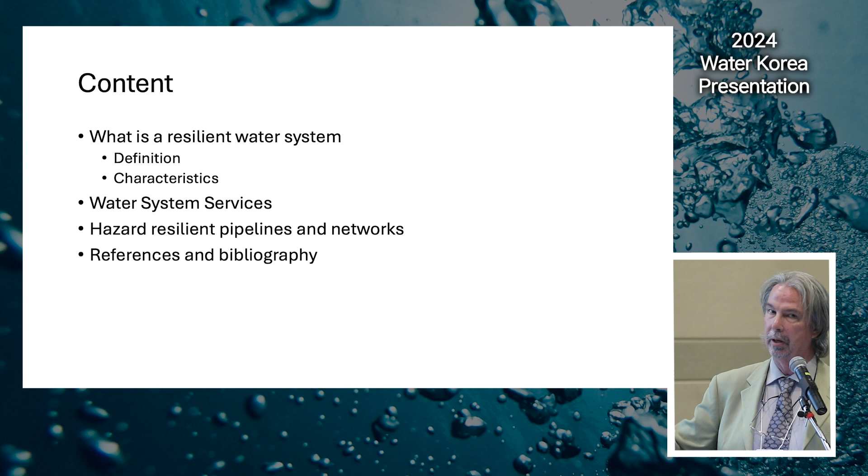And so what that required of me is to think about what is a resilient water system. Because I was assigned a position, but nobody really knew what it was. So you're going to get some benefit of that thinking process and me engaging with many people, not only in Los Angeles, but all around the world, trying to figure this out. Okay, so I'll go over some of this.

So let's start with a definition. This may be a definition you've never seen before. It's a working definition that I use and has been accepted by a lot of different people in its concept. What is a resilient water system? It's one that's managed to provide safe and reliable services to customers and users, cope with chronic stressors, and accommodate hazard-related impacts with the ability to continue providing services or limit service outage times tolerable for community recovery efforts.

So you notice the word services is really important, and I'll get back to that a little bit later. And it also actually requires another definition. So what is tolerable to a community? How long can you go without the appropriate services? How long can you go without meeting water quality requirements? How long can you go after an earthquake without getting any water at all to a hospital?

These are questions that are very difficult to deal with by all water systems, because none were actually designed to be resilient. We're trying to make them resilient now. And how do you manage this? This is a big issue. So hopefully some of this information helps. So we'll start with that definition, and now I'll go to what makes a water system resilient. Well, here's just some ideas that help you understand whether you're getting more resilience into your system or not.

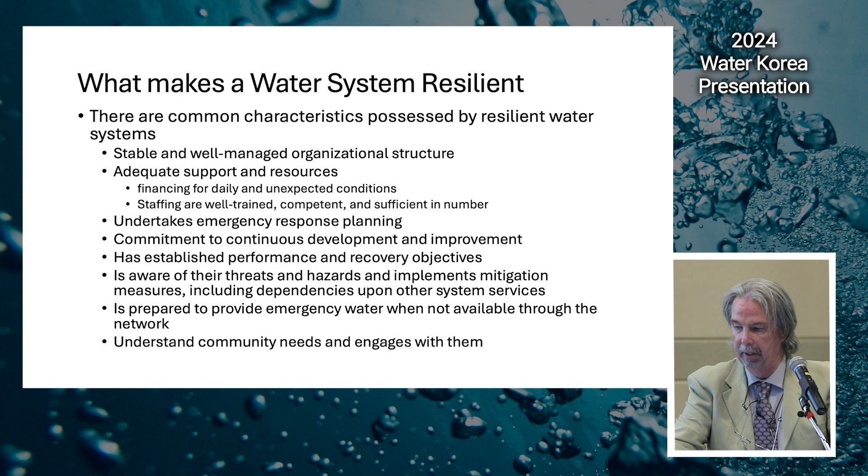Some good practices that are utilized by resilient systems are they implement risk management. They implement asset management. They replace the assets when appropriate with the appropriate materials to improve the resilience of their system as they're replacing it. So you saw a map of a pipe replacement program in the last presentation.

A resilient water system, Sierra Madre is actually an earthquake zone, so I would pose Sierra Madre would be looking to see if some of those pipes should be more earthquake resilient. Or if you're in a flood hazard zone, are they more flood resilient so they don't get eroded out and fail in those services? And they utilize the resilient materials when they're doing that.

They have continuity plans, so that would be business continuity or continuity operations. They have emergency response drills and exercises. They implement safety protocols during the disaster, not just before and after, but during as well. They implement water resource and water quality management, which is of course a huge field into itself. But you have to think about it in terms of the disaster that may strike.

They have consistent standards and guidelines, and that's important because almost all guidelines, turns out, are not consistent in the way we design our systems for the different hazards. They actually have total discrepancies where if you implement one standard, you're anti to another hazard. So we don't have a good handle on that probably very well anywhere in the world.

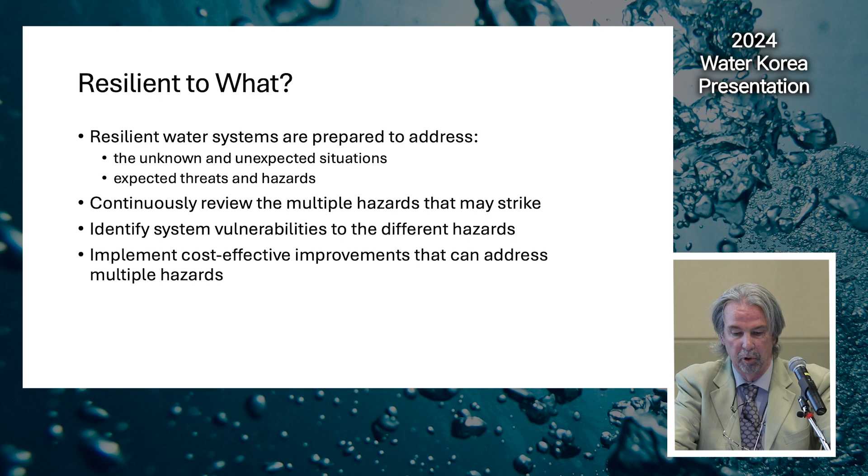So the expected and unexpected include the natural hazards, the technological hazards, and the human-caused hazards of all types, like all kinds of human threats. You continuously review the multiple hazards that may strike and try to address them; one solution that can address multiple hazards is really good for resiliency. And you implement cost-effective improvements that can address those multiple hazards.

So I just gave an overview of some of the most important initial things that you need to address, but this paper I'll refer you to, and it's in your book. I'm really pleased to see that the presentations were there because I made this hoping that somehow these slides would be made available. There's 17 characteristics listed in this paper, and 120 achievement indicators that if you're able to possess those achievement indicators, then you're acquiring these characteristics of a resilient system and continually improving over time. Those are all listed in here, so I refer you to those.

Now, back to the services. Resilience, to me, is all about the services provided. We wouldn't have a water system if we weren't trained to provide services to your customers. We're really all about the services. So a hazard strike like a monsoon, a landslide, a drought, earthquakes and so on can cause damage to water systems and or negatively impact the water supply and the water quality. So the damages and impacts disrupt the services to the customers in some manner for some length of time.

The service losses prevent the restoration. The service losses and restorations need to be prioritized based on what the customers do. So not all customers have the same priorities. And a simple example that's very easy to understand is a hospital is more important in a disaster than a sports complex, maybe two ends of the spectrum. So you just don't start restoring services. You restore your services to those that need it to help the community become more resilient. The water system is not resilient if the community is not resilient. They go hand in hand.

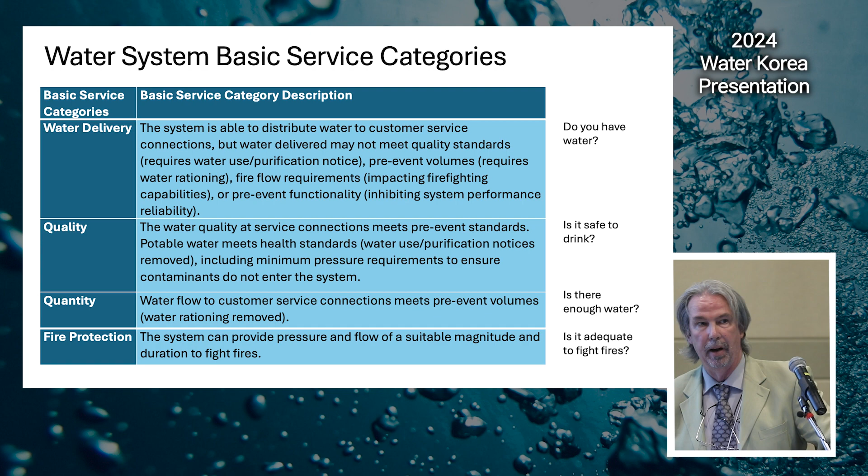So functionality is a measurement of how every component in a system works together so that you can provide these, but it includes a lot of redundancy. And there's a lot of human activity that goes into this too. But we got the 70% functionality, meaning that we still had another 15 years of repairs in Los Angeles, but in 12 days we were able to get everybody the services that they needed.

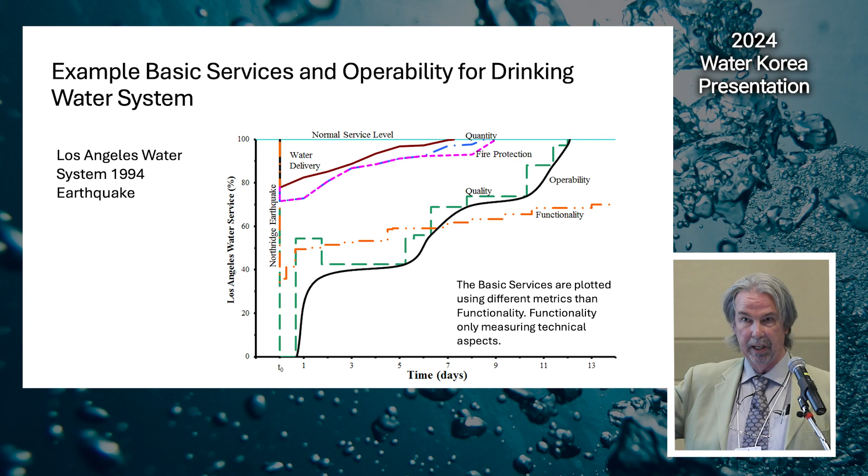What does that mean in terms of community resilience? With respect to the water, everybody was restoring themselves to normal activities at 12 days after a very significant earthquake. That's pretty good. We were resilient to this event. We won't be resilient to all events, all earthquakes. Many are going to be much bigger than this and also might strike in more vulnerable areas of the city. But you can measure these, so we can actually use this as a marker for improving our resilience.

So back to a portion of the definition. A resilient water system provides the services to customers and users when they need them during a disaster. So again, the hospital is not the same as the sports complex. So that requires knowledge of which basic services that I just showed, which ones of those are needed by customers. You don't need potable water to fight a fire. So if you have a fire, don't hold back the water because it's not potable, just because houses need potable water. In the United States, we have a boil water notice.

I don't know what they do here. I know in Japan they don't have that. That's a risk management measure that temporarily allows, with approval, to hand over the water quality requirement to the customer for a very short period of time. Boil your water, put iodine tablets in it, use chlorine a little bit to purify it for a very short period of time during a disaster. So you can do this and fight fires, same time, right? So we just have to do things in an alternate way.

That's a resilient activity. Prioritizing the importance of customers and users for the community resilience. Again, hospital versus recreation center and everything in between. Who gets what and when, and how easy is it to get them? It's a difficult prioritizing process, but we can do this. And designing components based on the customer importance. We need to think about the supply chain from source to service, and just because it's a bigger pipe doesn't mean it's more important.

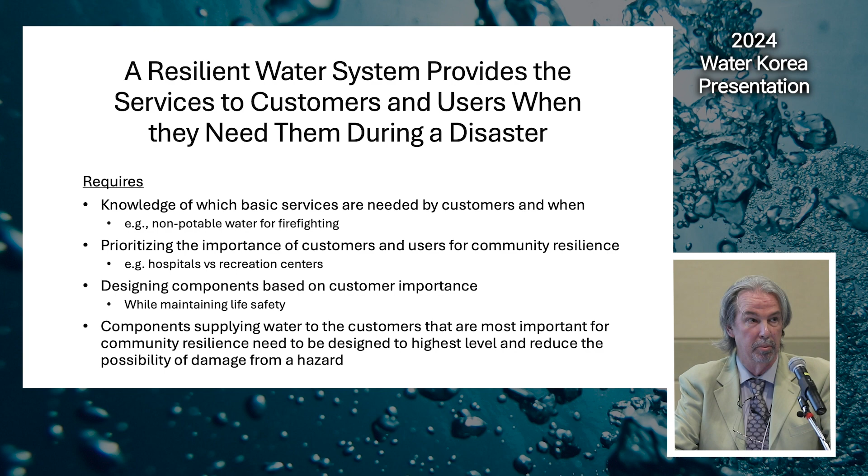So components supplying the water to the customers that are most important for public health and safety need to be designed to a very high level relative to the standards. And those that are important for community resilience that might not be so directly related to public health and safety to another level. Those that don't meet those two requirements, okay, so maybe you go without services to the recreation center for a little bit longer. Fair enough, but that might be an important economic activity in some cities as well that needs to be thought about.

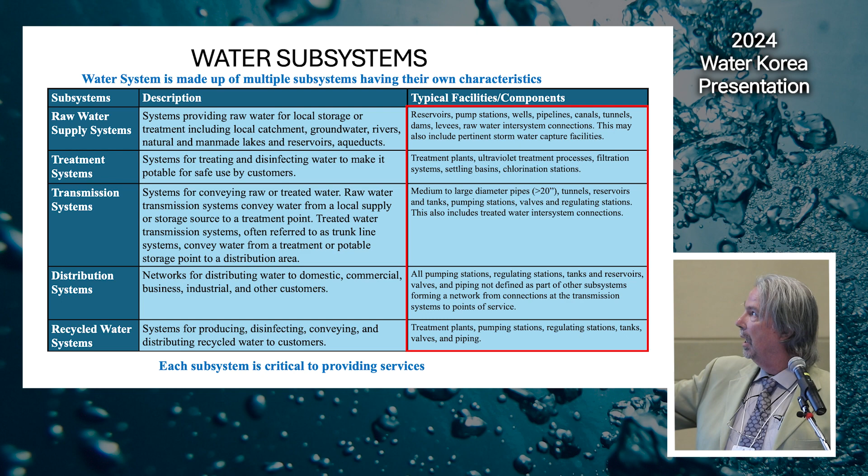So we know that the systems can be broken down in subsystems. I like to think about it in terms of raw water supply, treatment, transmission, distribution, and recycled water, or reclaimed water, whatever you want to call it. You can each have your own definitions, but they all have different components, and those components interact, and these subsystems interact. All of these components need to be designed to withstand the hazards that they're exposed to. I'm going to give you a quick example of water pipelines, but you could think of this in the context of all other components in the system.

So buried water pipeline performance influences the ability of water systems to provide services to customers, right? Coming from the treatment plants, coming from the reservoirs. It's important to consider the potential impact of the hazards on the pipeline performance, as well as the response of the water supply networks. It's not just the single pipeline.

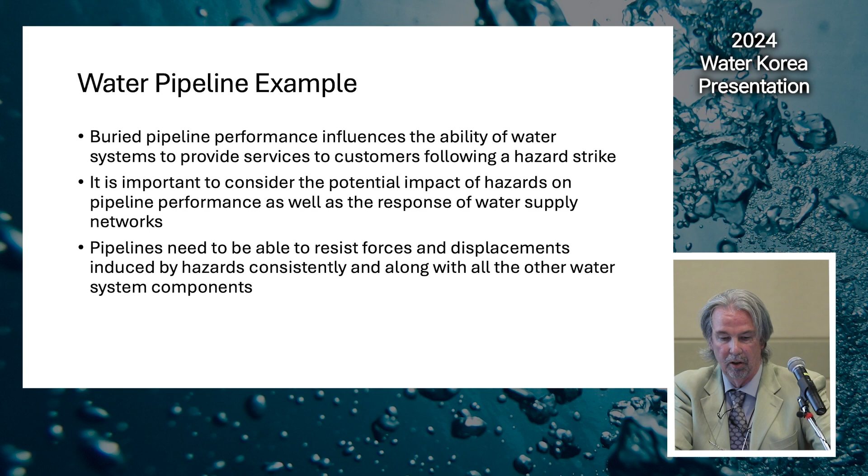You don't worry about a pipeline. You've got to worry about how that pipeline interacts with all the pipelines around it, and the tanks and pump stations and treatment plants. And the pipelines need to be able to resist the forces and the displacements, like a landslide, the wave propagation, induced by the hazards consistently along with the other components.

So let me introduce to you something that I led here for the past few years. It is just recently finished, but we formed an international hazard resilient pipeline research panel, consisting of 9 experts. 3 of us are here in the room, Professor Wham, Professor O'Rourke, who will speak next, and myself, and then others from the United States and several from Japan. So from 21 to 23, we investigated the use and needs for hazard resilient buried pipelines. And we developed a process and a matrix that you could find and download here at this reference.

And this is the matrix, and this is the process and the outline next to it. I'm not going to talk about hazard resilient pipelines because the next 2 presentations from Professors O'Rourke and Wham, respectively, will get into more details on those. But what are we doing here?

We're listing the common types of hazards that affect buried pipelines, how they affect them in the next column, then the types of impacts to the structures, and we rate them by 1, 2, or 3 X's based on the likelihood. 1 X is lower likelihood, 3 X's is higher likelihood. The likelihood of service disruption from these hazards, again, 1, 2, or 3 X's, and then the potential service disruption based on low, medium, or high, L, M, or H.

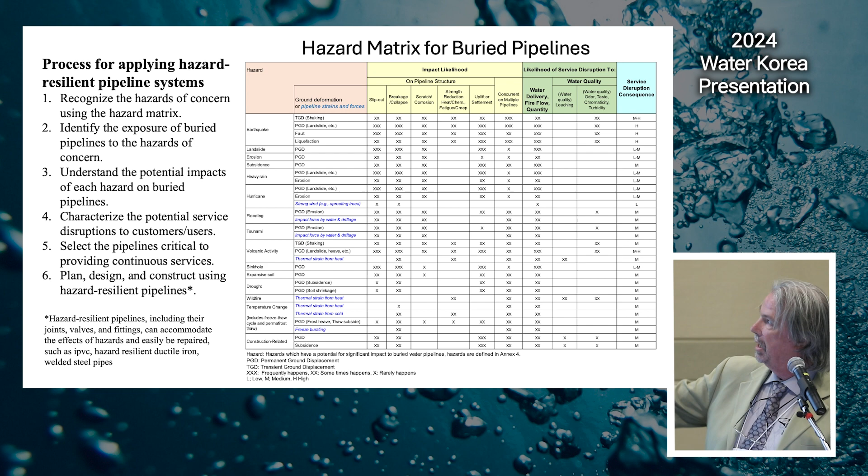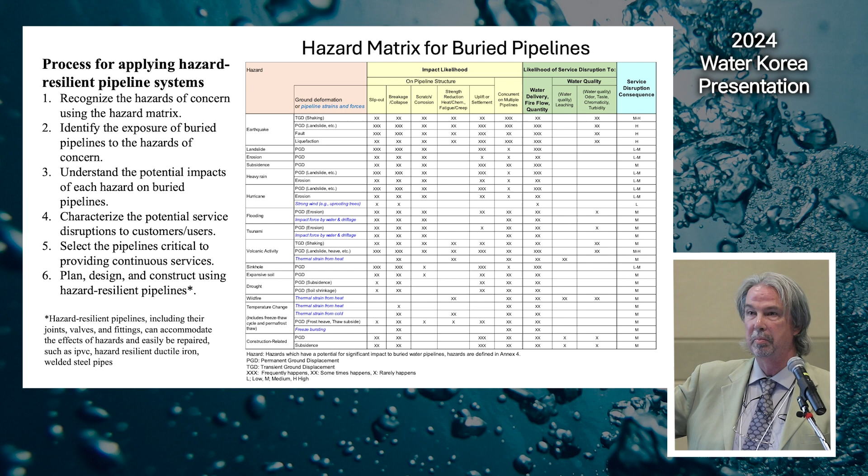So I'm not going to go over this in any more detail. If you're interested, please feel free to download it and contact me as well, or others. And then you have this outline that, for sake of time, I'm not going to go through, but it's a standard risk management outline where you identify your hazards, hazard location and pipe location, and you work your way through a risk management process and identify which hazard resilient materials you should use and then implement them. So I'll leave it at that. You can refer to that in your book there.

And then you think about it again as a network. So you need a supply chain of pipelines and components, the tanks and reservoirs and treatment plants, that match the needs of the customers. So for hospitals, the supply chain from source to service connection should all be designed to the same highest level standard. If you have a weak link somewhere in between, whether it's exposed to a hazard or not, because there's a lot of unknowns in there, then you're going to lose your services. You don't want to lose those services. And so you can categorize these based on different levels in the way you want to view your customers within your system.

You can integrate that with your asset and pipe replacement programs. So you could think about this not in a budget cycle of 3 or 5 years, but decades and even 100 years. We built these systems over 100 years. We can replace them and make them more resilient on a daily basis, but over the next 100 years, because we can't do this overnight. We don't have the money to do this. And so if you think about it in terms of the long term, then it becomes achievable.

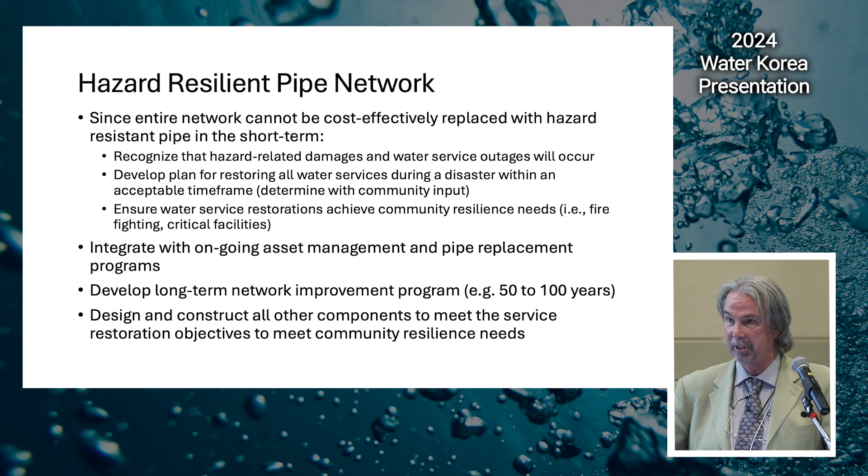If you think about it in terms of short term, nobody can achieve it. And so then you just say, well, there's nothing I can do about it anyway, and you move on and you never create a resilient or sustainable system. So we do need to think about it in the long term.